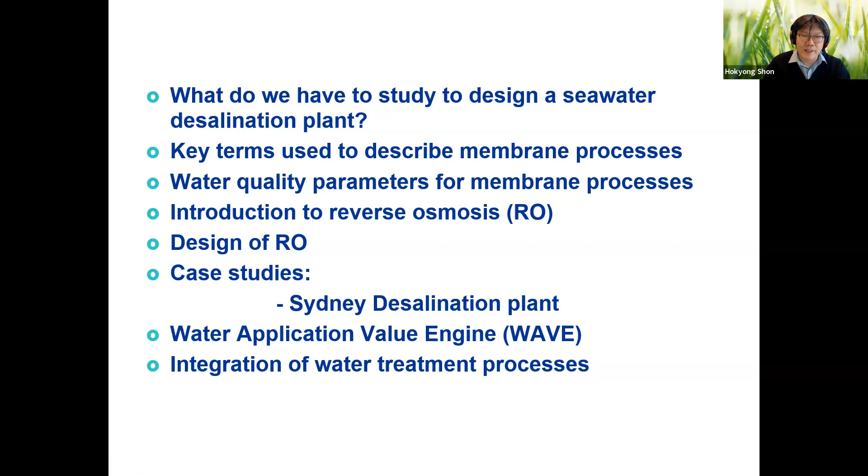For seawater desalination, you can see the global seawater reverse osmosis capacity. You can see the different types: thermal desalination, like boiling and distillation, then the seawater reverse osmosis membrane desalination process, and also brackish water and wastewater reuse desalination. Since 2013, for almost 10 years, thermal desalination has been very stable, but seawater reverse osmosis installations have increased significantly, and BWRO has also grown a lot.

Which means we can focus on seawater desalination using reverse osmosis, because it is more cost-effective compared to the thermal distillation process, and it is a more reliable technology. So we learn in this subject how to design your desalination plant using reverse osmosis. For your assignment 3, you need to design a seawater desalination plant for Sydney Water.

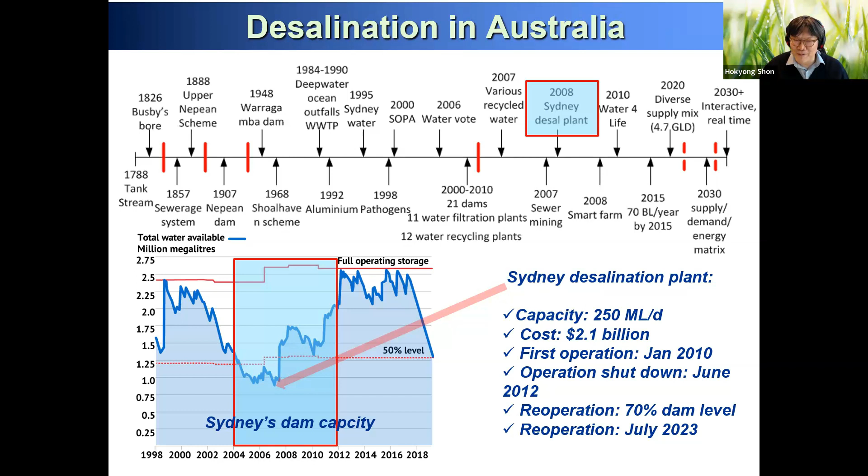So we have 6 desalination plants. Let's talk about what happened. We already discussed the Sydney desalination plant, so let's start from number 1.

And then Victoria, how about Victoria? Melbourne is one of the very interesting water supply systems. Melbourne Water has a very big mountain and dam to store their water. Melbourne Water doesn't have any drinking water treatment process, they just...

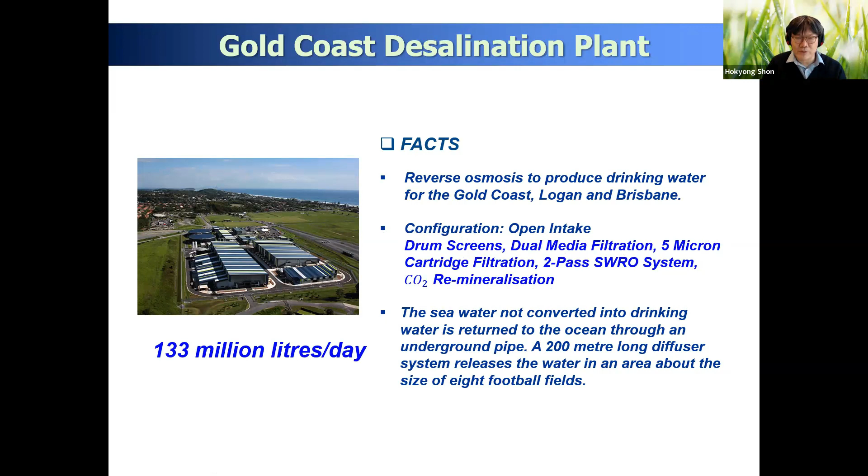Compared to the previous one, they have a slightly different process, so you need to compare which process is the most suitable.

Adelaide: 300 megaliters per day, and the plant can deliver up to 100 gigaliters of high quality drinking water a year, half of Adelaide's water needs.

The plant's water production capacity is extremely flexible. The output can be as low as 10% or as high as 100%. This plant is very different from the previous two because they have flexibility to increase to 100% fully, down to 10% operation, because they use ultrafiltration, second pass, and then seawater system.

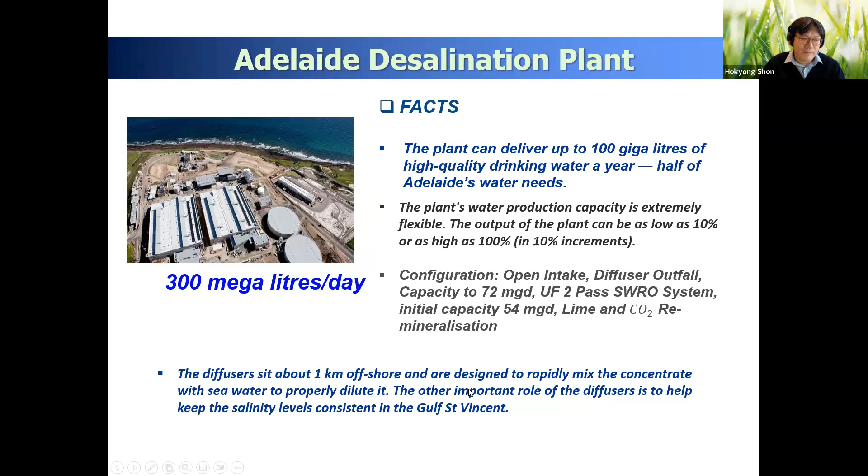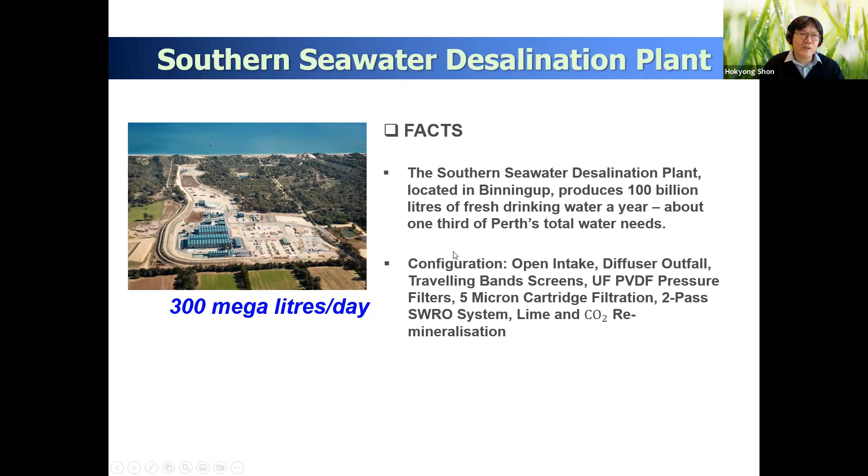The Southern seawater desalination plant, 300 megaliters, differs by using ultrafiltration. Compared to sand filtration or ultrafiltration, that's the different pretreatment you can utilize, then SWRO, which is used for the southern desalination plant.

How about the Sydney desalination plant? Sydney desalination plant: 250 million liters per day. The site covers an area near Kurnell, near the airport, a small area, about 25 kilometers from Sydney's central city.

This one has open intake and diffuser output, drum screen, dual media filtration, and cartridge filter, second pass SWRO system, lime, and fluoride. The fluoride is for cavity prevention, so you have more fluoride concentration to reduce cavities in your teeth, and you benefit from this.

Fluoride and CO2 remineralization. The specifically designed outlet nozzle ensures that the water returns to normal seawater salinity and temperature within 50 to 75 meters of the outlet. Approximately 58% of intake water is returned to the ocean, so their brine goes back to sea again.

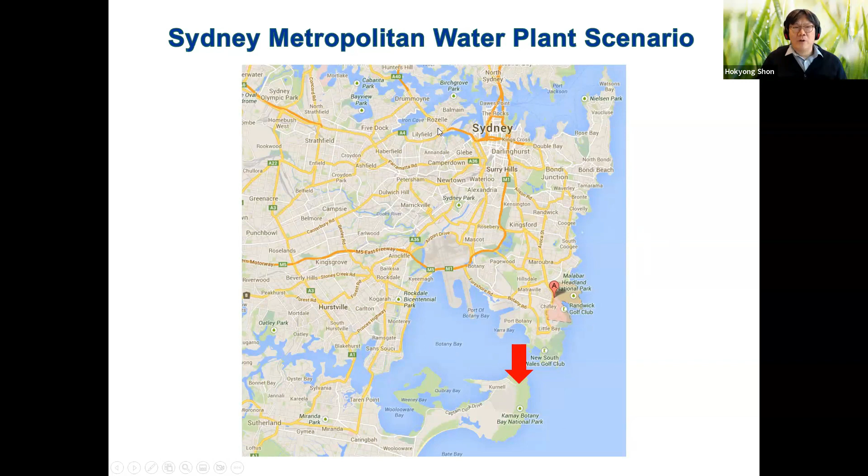This desalinated water goes to Sydney Park, which is part of the Sydney water distribution system. Combined dam water is coming to this Sydney Park, and then this desalinated water comes here to mix together, and they will supply drinking water in this area. That's how Sydney's water is maintained.

I will show you how the Sydney desalination plant works.

Can you see the video? No, Professor, no. Okay, let me show you, I will share again.

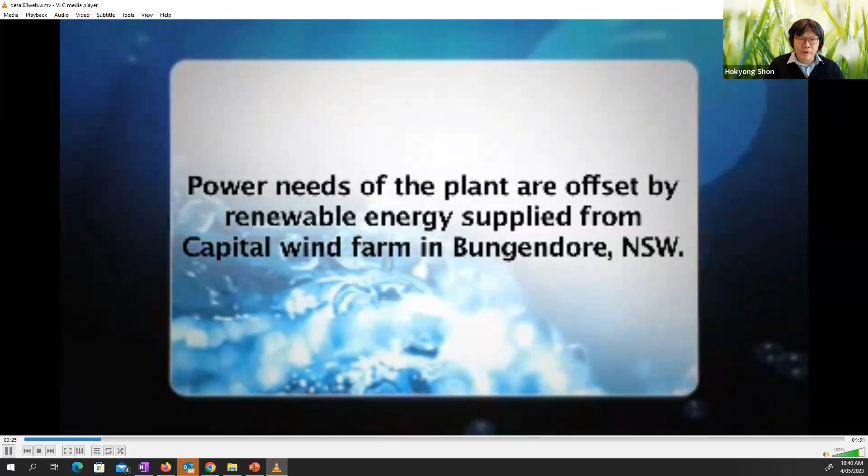Most of the power is from the wind farm near Bungendore. On the way to Canberra, I think you may also see this kind of wind farm.

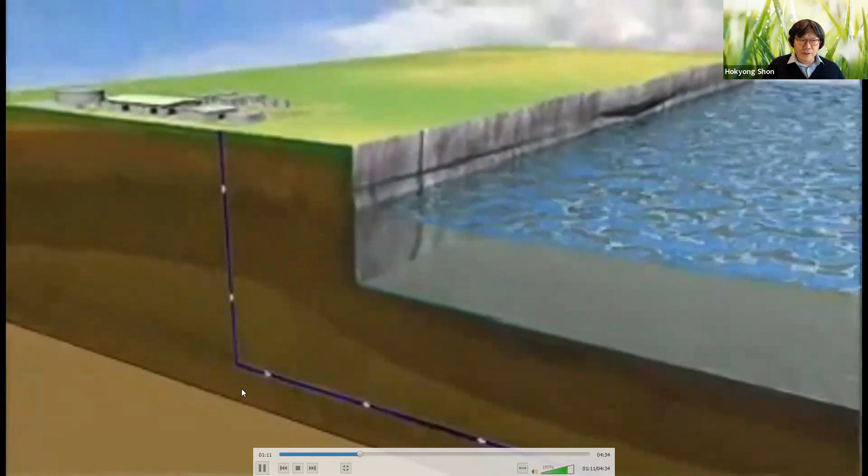This is the process showing how the Sydney desalination plant works. This is the water intake, almost 1 kilometer from the coastal line, connected with the intake. The seawater coming through the desalination plant looks very blue in color, and you have drum screening to remove some of the large particles or fish sometimes.

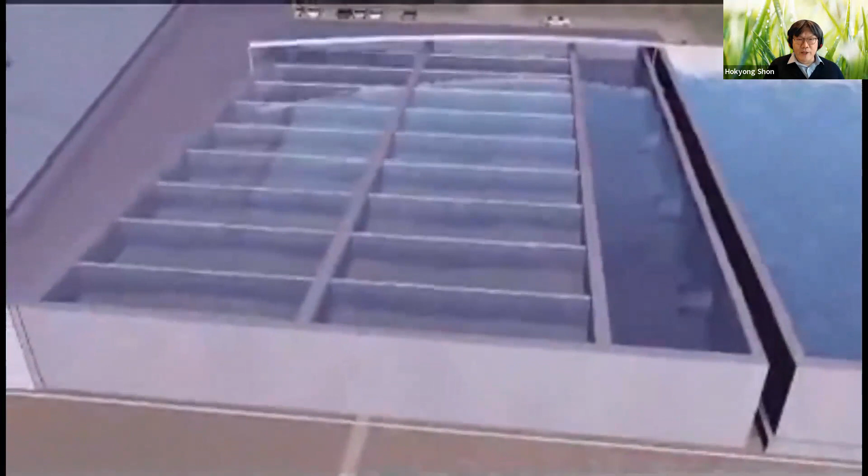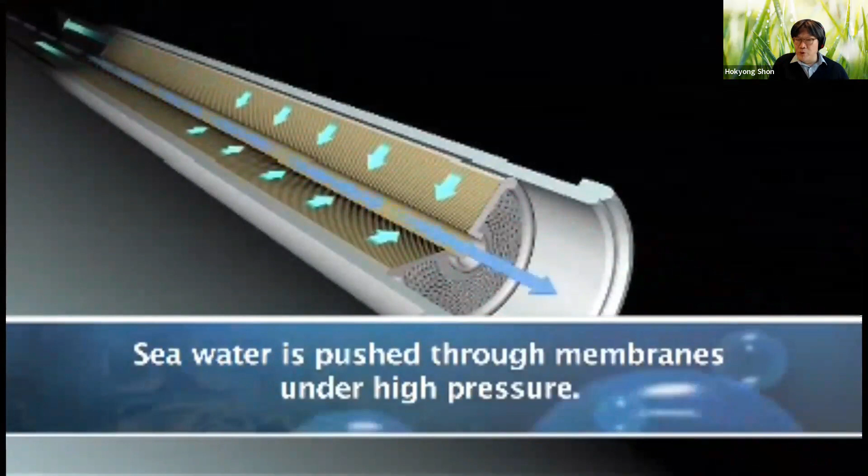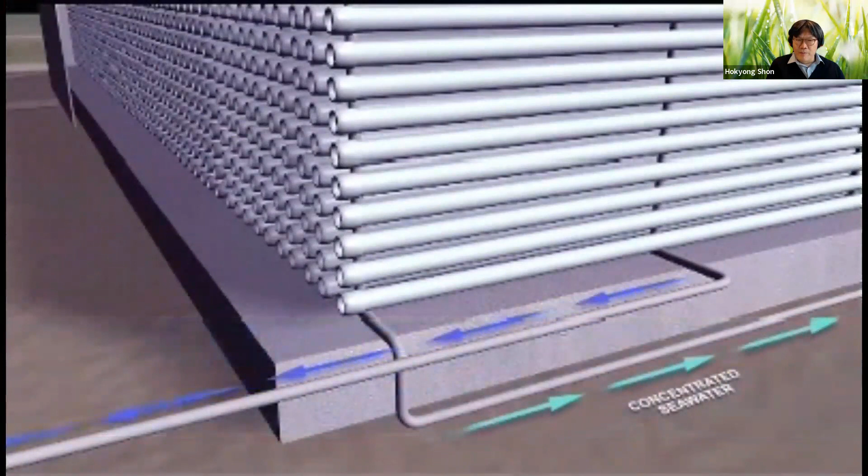Then it goes to the next pretreatment, sand filtration. Natural gravity passes the water through the sand filter to remove all the heavy objects, and goes to the reverse osmosis module. So you can create salt and fresh water separation, producing good quality desalinated water. This reverse osmosis creates fresh water, while the concentrate water goes back to the seawater.

Then mineral, fluoride, chlorination, and CO2 remineralization to meet the Australian drinking water guidelines.

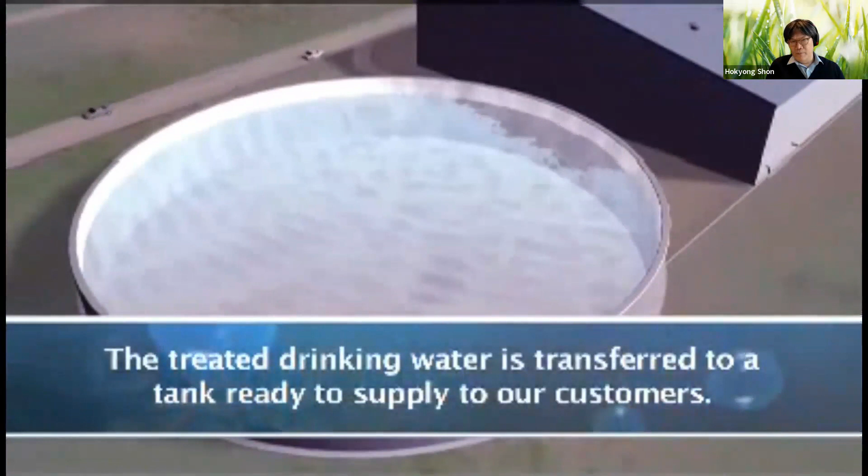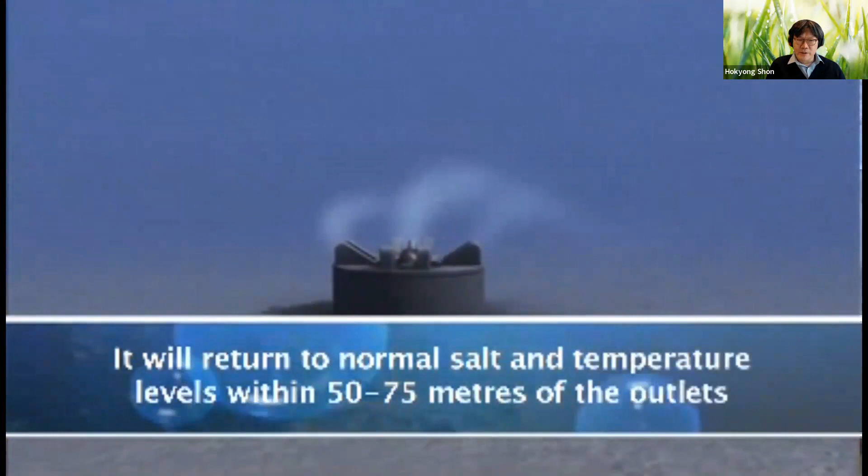This is the concentrate, so water is released back to the ocean. So you can see the diffuser. They have a diffuser because of the almost double concentration of salt. So fish don't really get impacted by this.

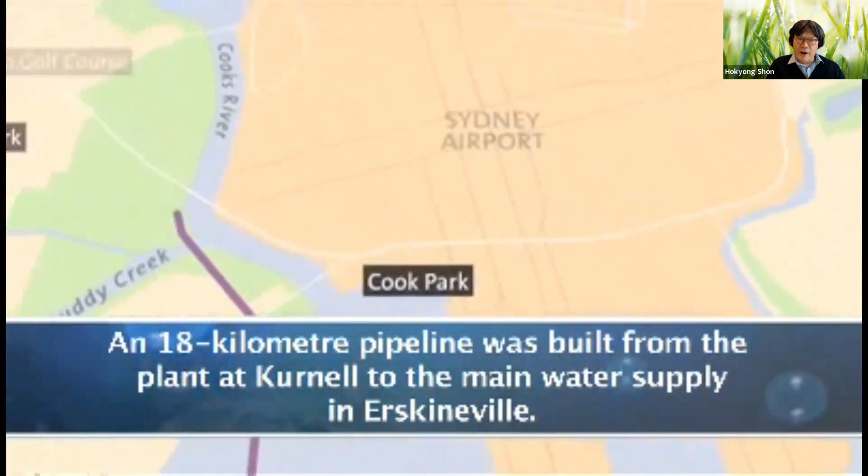So this desalination plant will supply your water passing through Botany Bay and then through your airport. So when you go to the airport, near the Cooks River, there is a very big black pipeline. You can see it with your eyes. Then this goes to Sydney's water supply system.

And then this yellow color, I'm not sure where you live, but you got the benefit of the Sydney desalination plant, mostly in the city, in the UTS campus as well. So we have good quality desalinated water. So that's how this works, the Sydney desalination plant.

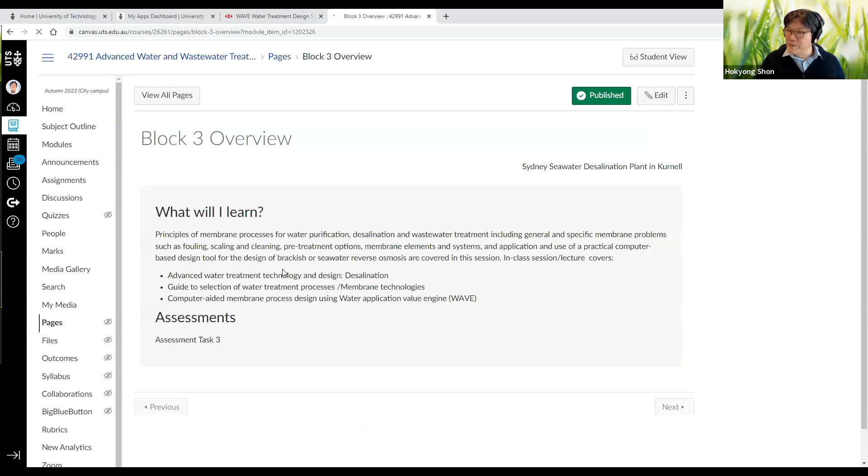Just want to start with our Canvas. Some people may have already looked at this detail, but I just want to remind you. Block 3 is already available with some information, so you can see the desalination plant; this block 3 is very well adaptable for your assignment 3. For reading materials, you can see the book Efficient Desalination by Reverse Osmosis, a guide to best practice. You can also refer to Desalination of Seawater. Every document is free as an ebook from our UTS library, so you can easily download and refer to it.

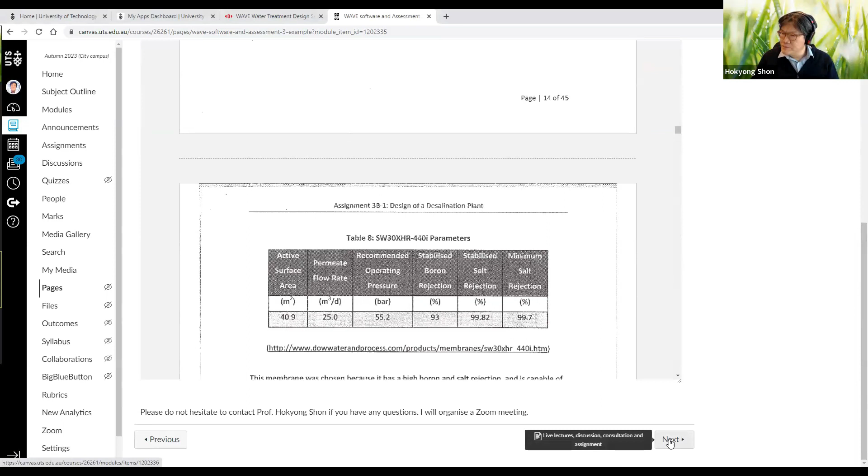Okay, that's what we have for the assignment. Let's look at the assignment. We have assignment 3. Assignment 3 will be uploaded based on the assignment scenario. The scenario will tell you the seawater quality and the parameters to design.

You need to look at the Sydney desalination plant water quality, as well as the total process volume from this scenario. The scenario will give you the basic information for your report 3, to discuss important issues related to desalination for future water security in Australia.

And then design details. So what's the process? You can follow the similar process of the Sydney desalination plant or Perth desalination plant. There are different processes of pretreatment, such as sand filtration or ultrafiltration. Based on your process diagram, you need to make sure of the detailed design of the RO process in terms of membrane, number of banks, stages, vessels, elements, and recovery.

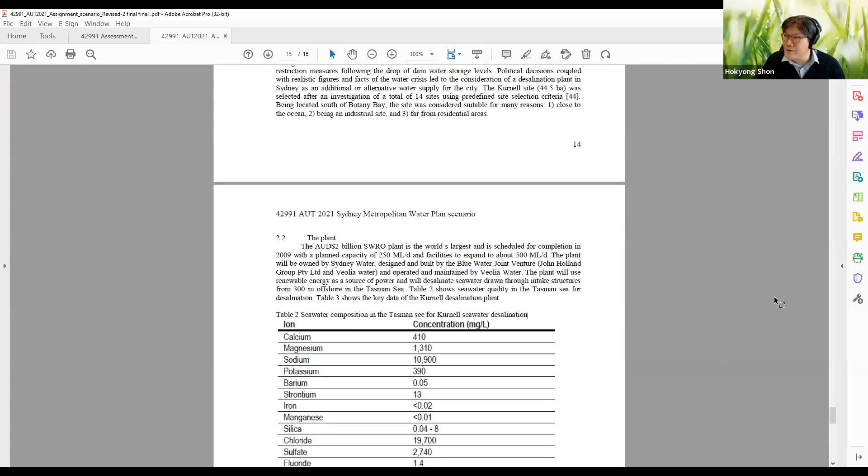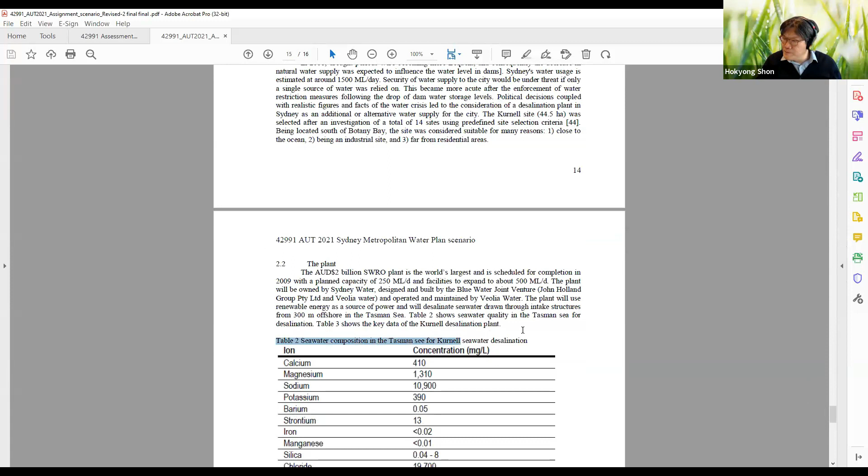So this is the scenario of your assignment. I'm sure you have already looked at this carefully. I want you to see your seawater desalination plant information from this scenario. What's the capacity? What's the water quality you need to take for your design? This is the basic information to have your own desalination plant. This is the water quality. You can use this water quality to operate your WAVE program. And these are the operating parameters of the Kurnell desalination plant.

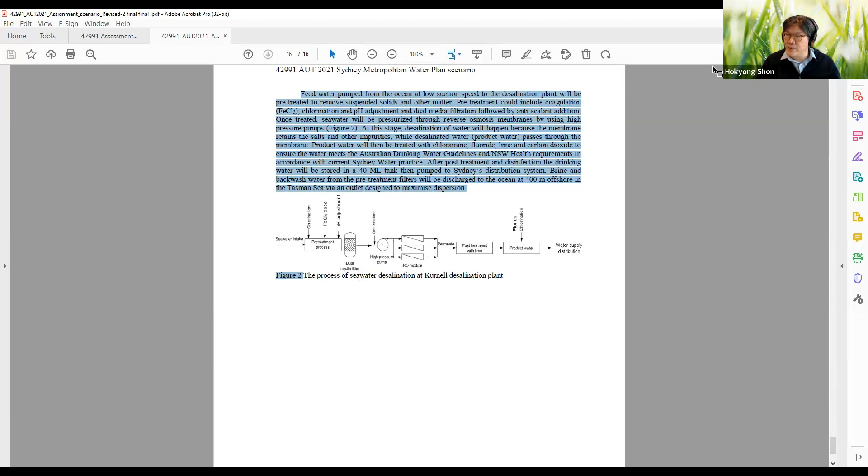This is the process flow diagram, but you don't have to follow it exactly. You can change it. You can change your media filter, or something else, or you can add to it. That's what we are asking for assessment three. Do you have any questions for assessment three? Is everybody clear? To do this kind of assignment, we have to learn the basic design parameters, considerations, and information for your seawater desalination plant. So we can start from this class.

Okay, this is one example, the Sydney desalination plant. They are operating this process diagram. This is how the seawater intake is coming, then chlorination, flocculation, pH, dual media filter pretreatment, anti-scalant, dechlorination, reverse osmosis, post-treatment with lime, remineralization with CO2, fluoride, chlorination, and finally discharge to the water supply system.

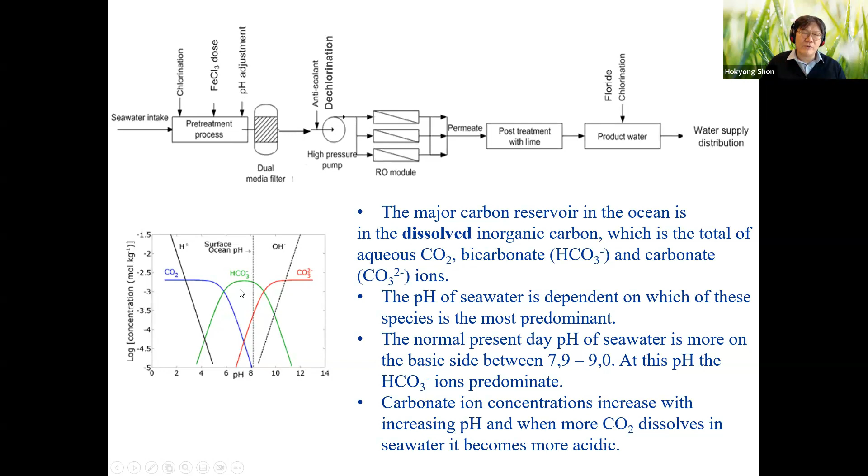Also, for pre-treatment, the Sydney desalination plant utilizes the dual media filter, which we call a conventional pre-treatment process. How about the Adelaide and Perth desalination plants? They utilize an advanced pre-treatment process, ultrafiltration. And this is the dual media filtration. I'm sure you have already experienced ultrafiltration with the membrane bioreactor. In the membrane bioreactor, hollow fiber ultrafiltration can be used. So you already know that advanced membrane technology can be used similarly for pretreatment in seawater desalination.

However, currently, conventional filters like a dual media filter or sand media filter are being utilized. But if you look at the capital cost, energy cost, total cost, they're very similar: $0.51, $0.52 for 1 cubic meter production. So what's the difference? Why do people prefer conventional or ultrafiltration? Depending on the initial capital, conventional is cheaper, but the energy cost of ultrafiltration is a little bit higher. Also, for overall quality, ultrafiltration has a much smaller pore size compared to a sand filter. So you will have better water quality, and this will protect your reverse osmosis membrane.

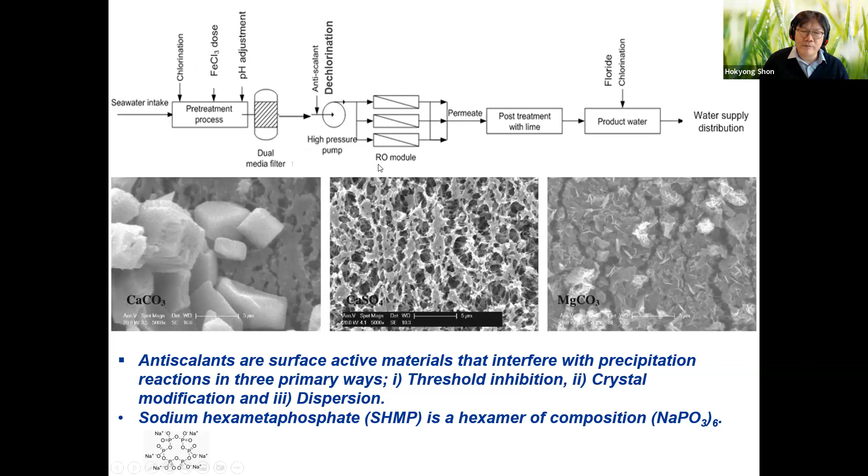Also, dechlorination. So why do we need dechlorination? So we have chlorinated here. We put in all the chlorine to prevent the biofilm, biofouling in the dual media filter. And before entering the reverse osmosis, you need to have dechlorination, because this will remove the chlorine. The chlorine will damage your RO membrane. The RO membrane is polymers, so chlorine oxidizes your polymers, so the RO membrane keeps getting damaged from the chlorine. So dechlorination is very important in your process.

The addition of sodium metabisulfite. The sodium metabisulfite is this compound, NaHSO3. The chlorine combines together, so they create NaHSO4 and 2HCl. So the chlorine oxidation power will significantly reduce. So we need to put in this SBS at a 3:1 ratio of SBS to chlorine, and then you can remove all the oxidation power from chlorine.

So we need to completely remove the oxidation power of the chlorine, or sometimes you can use a granular activated carbon filter to convert, with the chemical substitution process, the chlorine to chloride ion. The chlorine is a very active oxidant, but chloride ion is a very stable condition. It doesn't have any oxidation, so we can utilize it as RO membrane feedwater.

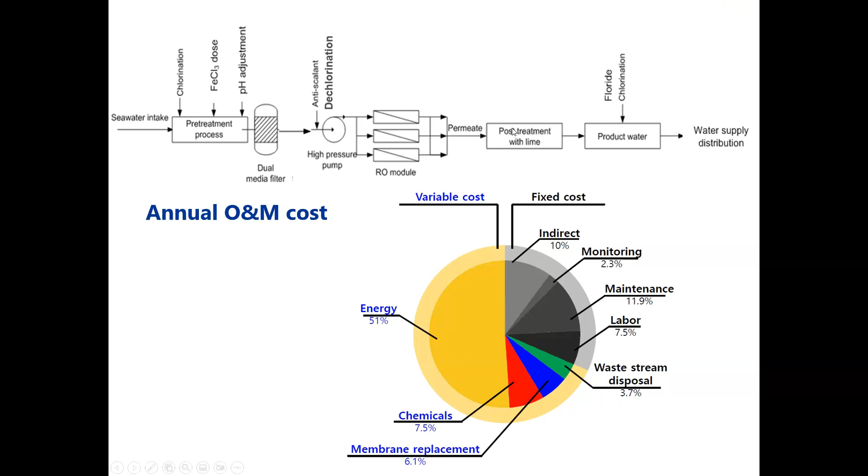What's the lime? It's a basic solution, right? People are confused about lime. Some people, mostly the general public, think lime is a fruit, a little bit sour, like lemonade or lime. Yeah, that's the misconception. That's why you're confused. This lime, we just say limestone. We are in the chemical water area, water professional engineers. So when we say lime, we are talking about limestone.

Which means calcite limestone, CaCO3, or lime itself is calcium carbonate or calcium hydroxide, Ca(OH)2. So lime here is calcium hydroxide or calcium carbonate. That's what we are talking about. So mineralization with calcium is the main key point for this lime. It's not your fruit lime or edible lime. It's more of a mineral, calcium limestone, that we are talking about.

Thank you. Thanks, Professor. You're very hungry, Sarah. That's why you're just thinking about fruits.

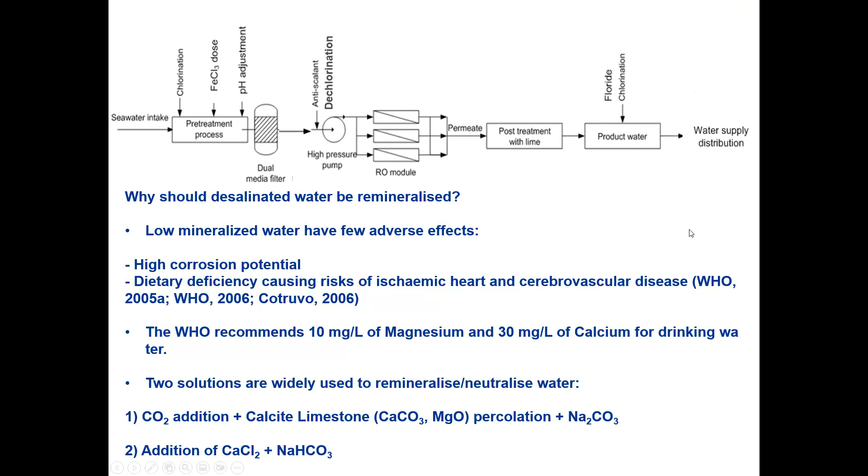Okay, Professor, thank you. Any other questions?

Otherwise, we continue with our key terms. Already you learned about flux from block 2. Permeate also you have experienced. And then concentrate - concentrate waste from membrane, so we just say brine or reject. Brine is the most convenient word from my side, for your high concentration water after membrane filtration.

So recovery is very important - how much you recover. Seawater has 3.5% salt concentration. If you recover 50% of the seawater, which means your feed water to permeate ratio is like feed water 100 cubic meter per day, then permeate is 50 cubic meter per day - so you have almost 50% recovery. When you recover 50%, your brine salt concentration is almost double, which means you have 7% brine concentration in your RO brine. The RO brine at 7% we can discharge, or we can look at whether it creates more inorganic scaling.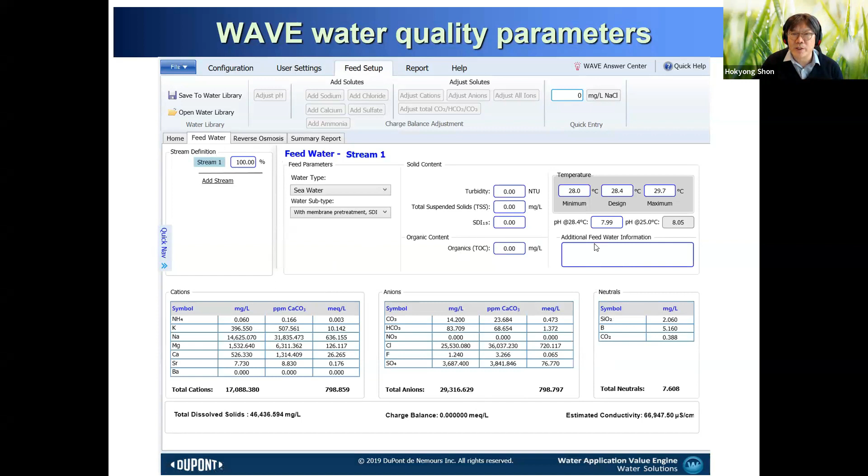Next item is seawater reverse osmosis history. Desalination has existed long ago, AD or BC, several thousand years ago. A lot of people utilized distillation: you boil your water to create distilled water, and then you condensate it.

This creates very high purity water. But desalination plants have a big scale for reverse osmosis. Distillation has a very long history, but reverse osmosis only started from 1956 in Kuwait, and then commercially in 1970. At that time, people believed the energy cost was 10 kilowatt hours per cubic meter, which was much more expensive compared to distillation.

Then one person developed energy reduction cost improvements, which was the first technology innovation: the RO membrane. The RO membrane was developed from almost 1980 till 2000, so reverse osmosis membrane further developed during this period.

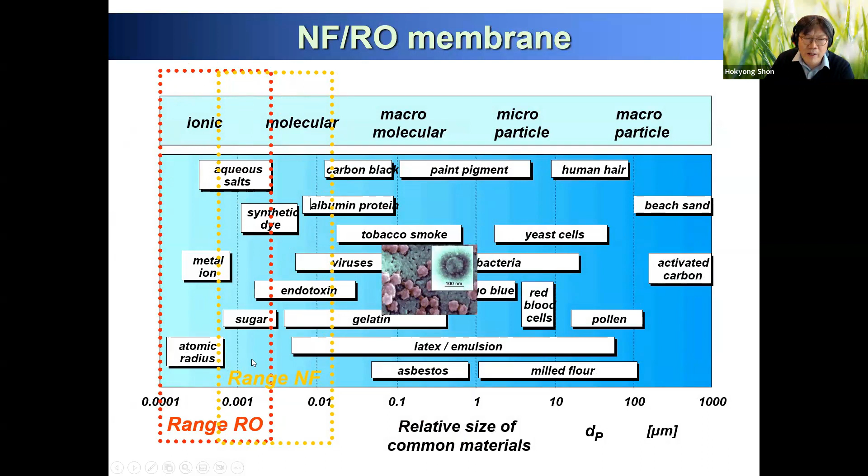Reverse osmosis membrane pore size is around 0.0001 to 0.001 microns, small enough to remove sodium chloride and every salt in your RO system. This is a non-porous membrane. As membrane thickness increases, permeable flux decreases, so the active layer should be as thin as possible. The active layer mainly separates salt and water.

The water molecule has a very small size, about 0.3 to 0.4 nanometers. The salt, sodium and chloride, has a size around 0.8 nanometers. So you need your RO membrane pore size to be almost 0.6 nanometers, so that you can separate sodium chloride from pure water molecules. That's why making the active layer as thin as possible is very important.

Also, you have an asymmetric membrane structure, a thin film composite. So how does reverse osmosis look? You have this one element, containing a spiral wound type structure. The membrane looks like this, with the active layer.

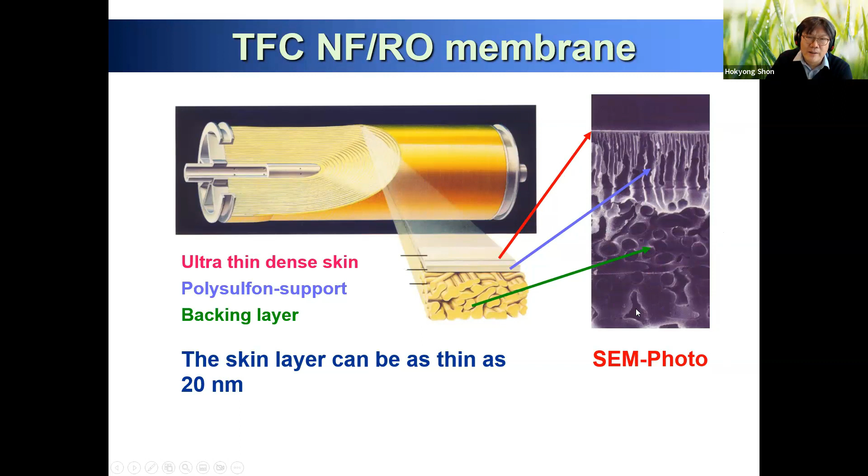The skin layer is only 20 nanometers, and this support layer is around 200 micrometers. You can also have almost 1,000 micrometers for your backing layer. That's how this works.

Let's look at a video of the membrane, how it's generated, the RO, and how it separates water molecules and salt. Let me show you a video.

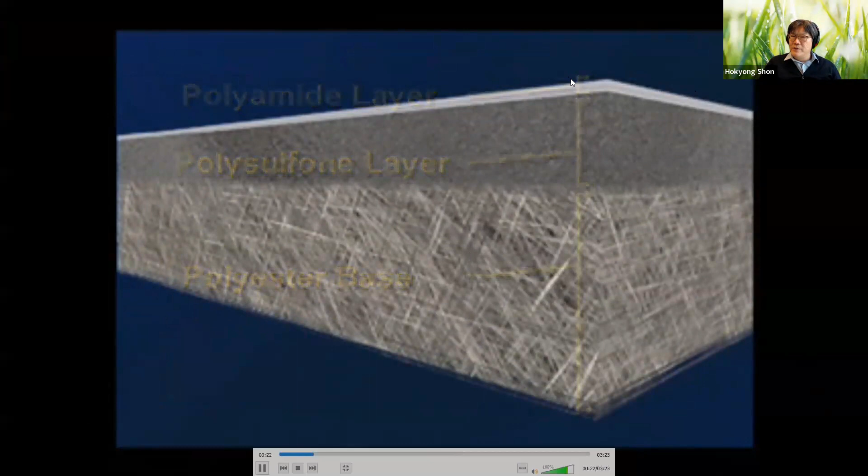So I will show you this video of how they create the reverse osmosis membrane. This is the polyester, a non-woven backing layer, and polysulfone, which is like a support layer, and this is your active layer.

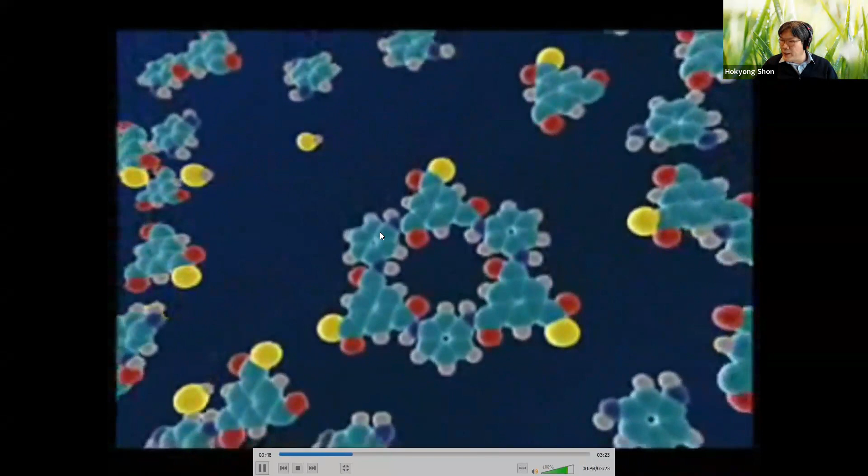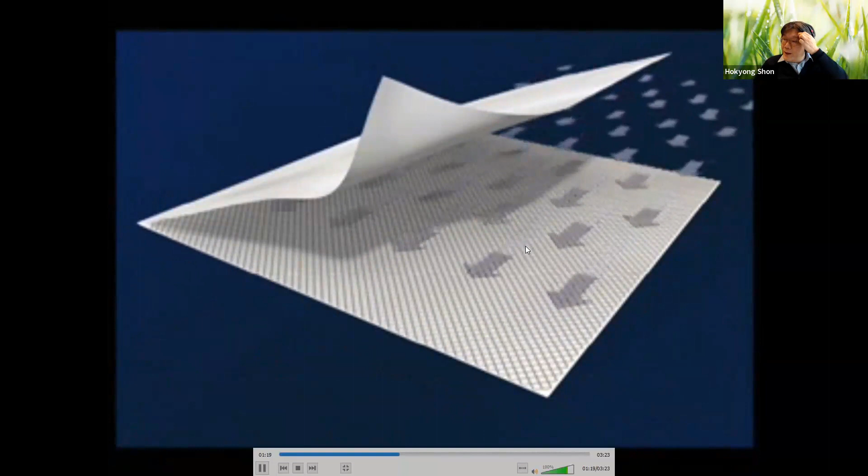So this is a polyamide structure. You just put the polymer, and this polymer will be interfacially polymerized this way. The amine monomer will create this kind of pore size, so the water molecule can go through this pore size. However, if you have a salt molecule, it cannot pass through the pore size of the polyamide membrane.

So you can fold this active layer, and water passes through in between your membrane. You put your glue, and then you put the membrane with your spacers, creating a membrane surface area, and on the other side pure water passes through and is collected in the middle of your pipeline. It's just like a roll, what we call a spiral wound element.

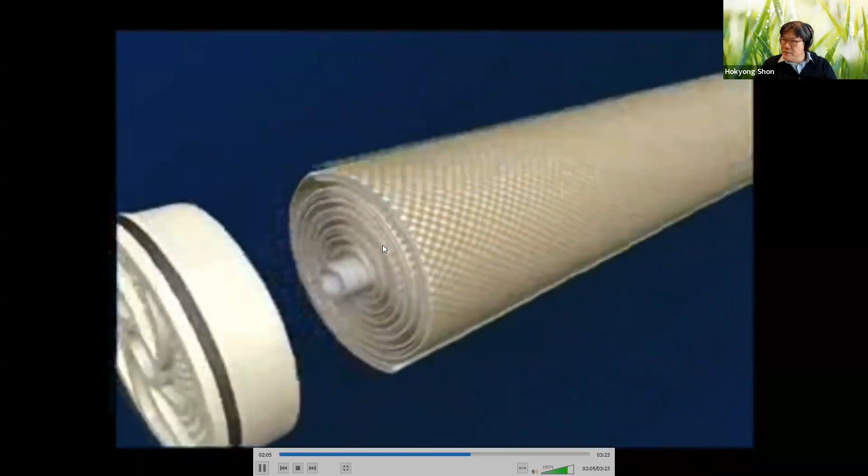The water is flowing inside the membrane, and then it will be collected in the middle of the pipeline as water molecules. You can separate water molecules and salt - that's how you create the reverse osmosis membrane.

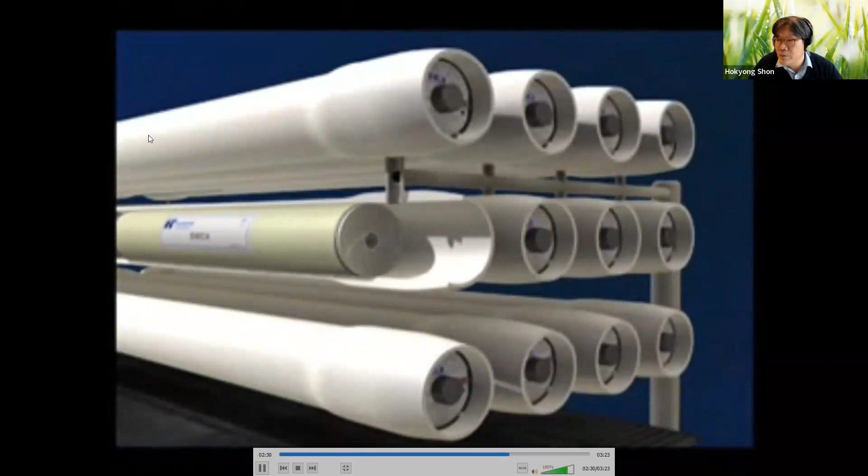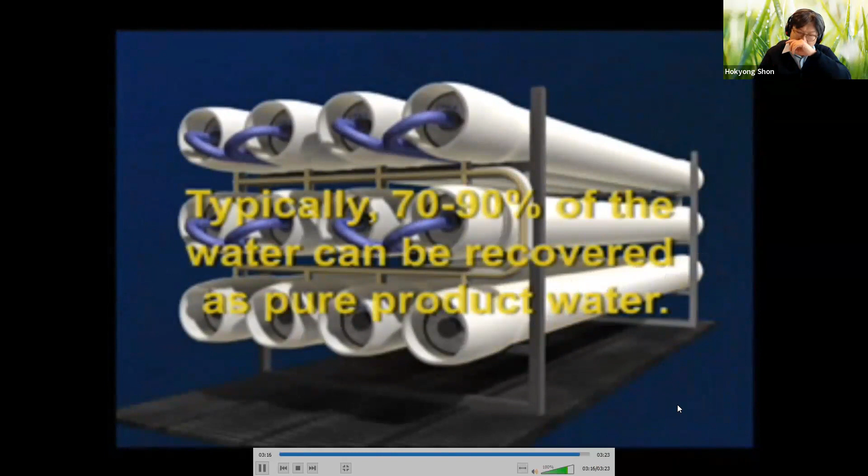You can separate fresh desalinated water and RO brine, so you have two different streams. About 90% of the water can be recovered as pure product water. That's how the reverse osmosis membrane process works.

So it's like a polymer, like a paper, but you can separate materials - the water molecule and the salt.

So does everybody understand what the TFC membrane is? Now we are going to discuss transport phenomena. The mass transfer across the membrane is diffusion and based on osmosis.

Concentration polarization is also very important, and permeate flux is limited by osmotic pressure and concentration polarization, apart from intrinsic membrane resistance, fouling, and scaling. So if you see this...

Osmotic pressure - what happens is we have reverse osmosis and forward osmosis. Reverse osmosis means you have a high concentration of salt, let's say brine, and fresh water. Different salt concentrations create different osmotic pressures, and you have a membrane in between.

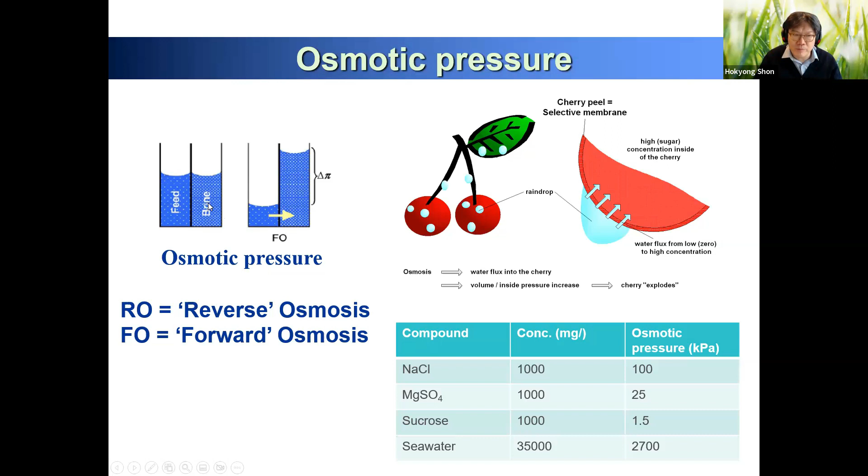So you will get good reverse osmosis. You overcome the osmosis reversely, and you create salt water to brine, and fresh water - that's what we call reverse osmosis.

This was developed by Van't Hoff, who got the Nobel Prize in chemistry. He developed this equation: Pi, osmotic pressure, is equal to...

...concentration times R, the ideal gas constant, times T, the temperature. Concentration is your ionic concentration - sodium chloride has two ions, so what's the concentration? Magnesium also has two ions. Depending on how many ions and how much charge you have, this creates osmotic pressure differently. So this simple equation can be used for osmotic pressure calculation.

Then seawater desalination. This is the feed water and reverse osmosis. The osmotic pressure of seawater is almost 30 bar, and the energy consumption is around 3.5 kilowatt hour per cubic meter. Recovery, you have 50%, 0.5 QF, which means 50% recovery of permeate flow to feed flow.

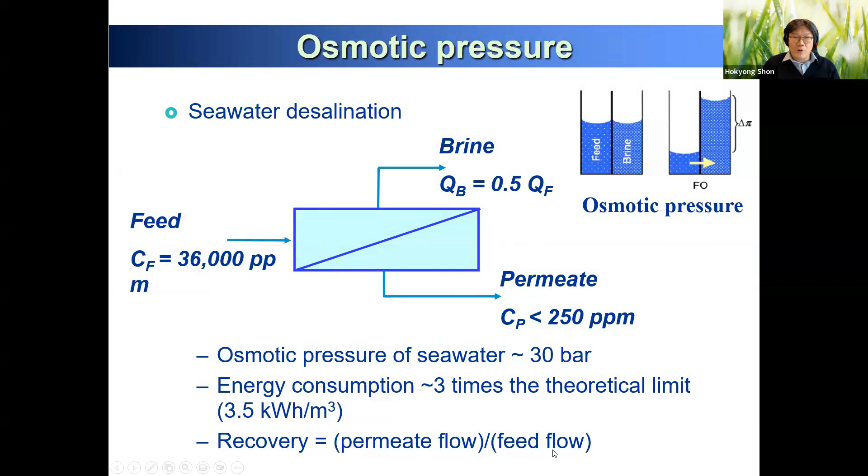So we can have this kind of concentration polarization. You have bulk seawater here and the membrane. Your water molecules pass through the membrane, and you can see that your salt will accumulate more and more on top of your membrane surface. So the real concentration on the surface is different from the bulk, which means there is diffusion from the membrane surface back to the bulk solution.

So we call this concentration polarization. The back diffusion can be enhanced by cross flow. When you have a very high cross flow, you can remove the accumulation of salt, so the high cross flow will create a high shear rate, which means you will have less concentration polarization because of the back diffusion phenomena. So that's how we calculate concentration polarization.

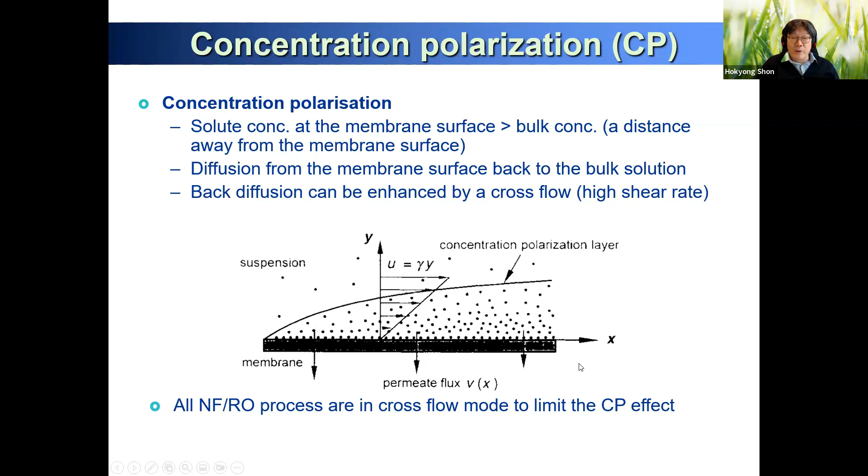But this kind of calculation is very time consuming, and you need to do it by hand, so we don't calculate it manually, but we can utilize our software, WAVE software, to calculate this concentration polarization. Also, nanofiltration, reverse osmosis. We have standard membrane element types.

So BW4040, which means brackish water, 4-inch, 40-inch. 40-inch is 1 meter, which is the length of your element. 4-inch is your diameter, which means 10 centimeters. It's how much module element you can use. The bigger one can produce more water. Small one like 4-inch, 40-inch, 8040, which means 8-inch, 40-inch, and this is 2.5-inch and 40-inch.

So based on your water permeability, you can decide what's a good element design. Also compatibility: the pressure vessel you put your module in, what size is okay, and we can create a better pressure vessel size and element. It's a simple design, benefiting R&D, end users, and manufacturers, but there's a lack of diversity of these elements. So let's look at the video of the NF/RO element, how they create this kind of element.

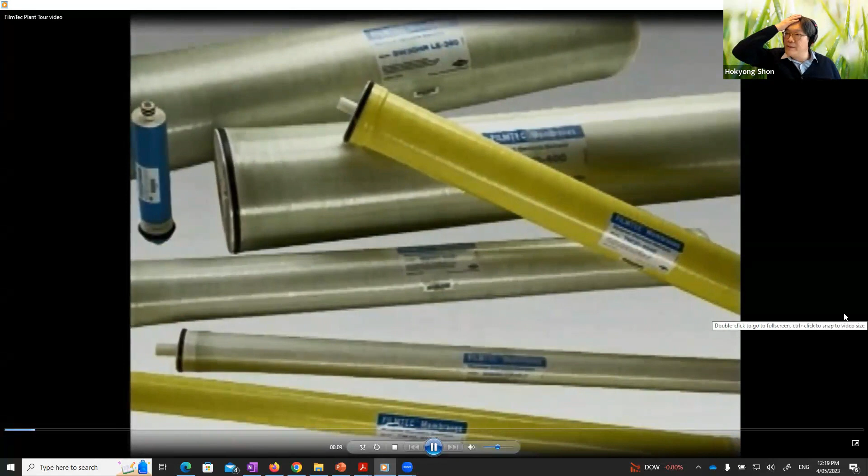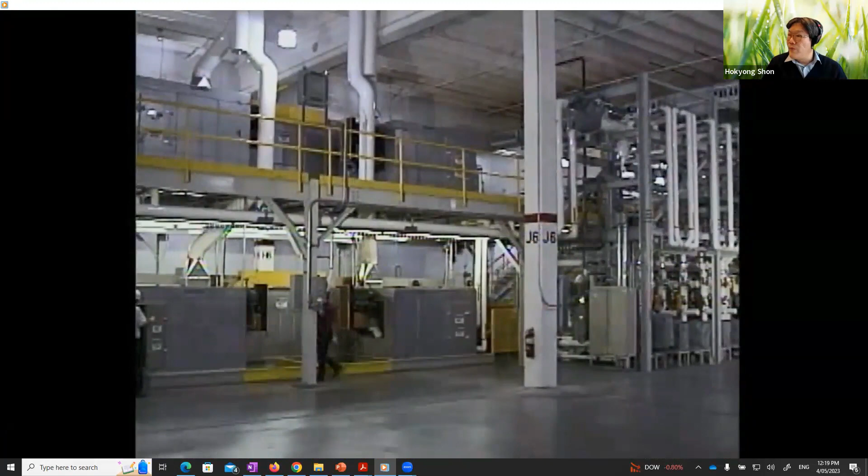So this is from Dow Chemical. They create this kind of thin film composite element module. You will see how they create this element for RO membrane. So this is the RO membrane, interfacial polymerized, IP, and they make a spiral wound type using this manufacturing system. So this is how they create the modularization.

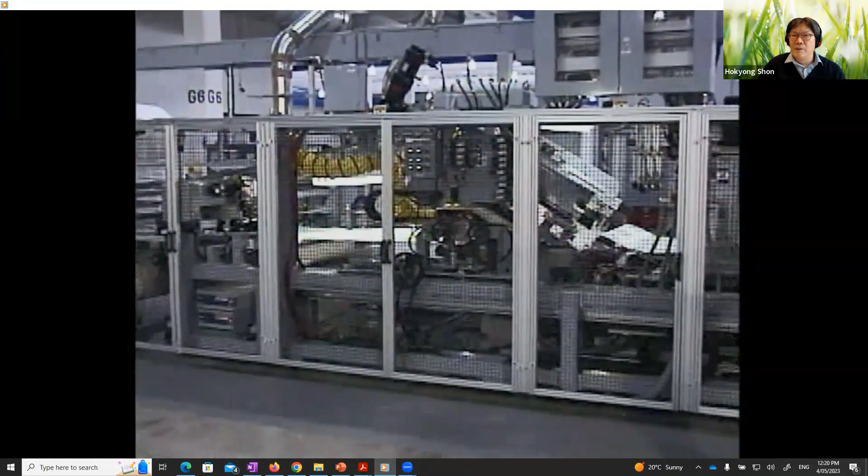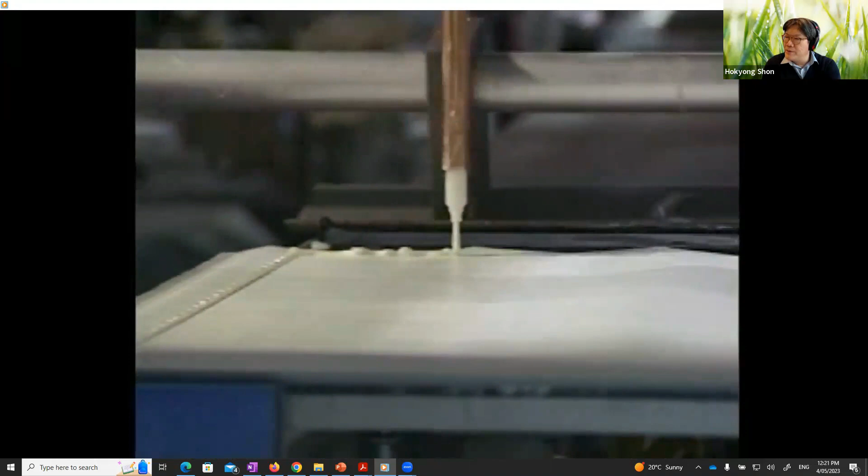Robotics for leaf construction and assembly ensure that every element is precisely built without membrane damage that often occurs during manual handling. Automation enables construction of more shorter leaves compared to manual rolls, resulting in a more efficient product that is less prone to fouling. Precise computer-controlled glue lines ensure the highest active area in the industry with guaranteed accuracy and minimize leaks, which can result in poor permeate quality. FilmTec elements are optimized to have the highest active area combined with the thickest feed spacer in the industry, offering improved cleanability, lower pressure drop, increased durability, and the ability to handle more challenging feed waters.

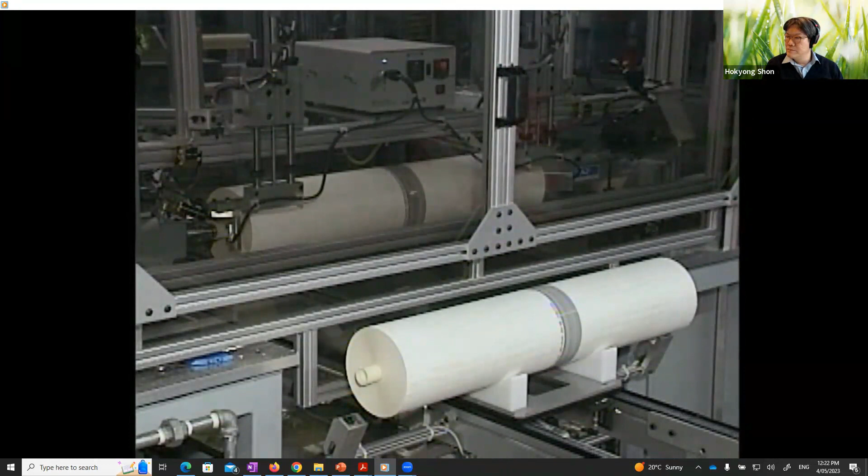A unique barcode allows continuous tracking of each element. Online quality checks for scroll integrity and dimensions and an inline vacuum test are performed on every element to ensure mechanical integrity. Any elements failing preset measurements are discarded. End caps are welded to the product water tube in a process that improves element strength, and a quality test ensures weld integrity.

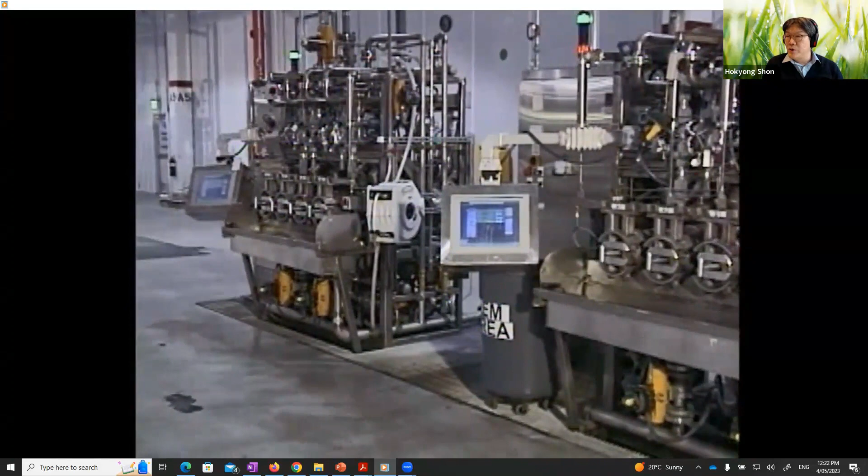So you can see that this automated fiberglass process ensures exact and uniform fiberglass outer application within controlled dimensional tolerances. To validate final element performance, FilmTec uses both a traditional 20-minute performance test and a groundbreaking pulse integrity test, which has the unique ability to detect and diagnose mechanical defects. It costs around $100 for one element, but you can utilize it almost 5 years on average.

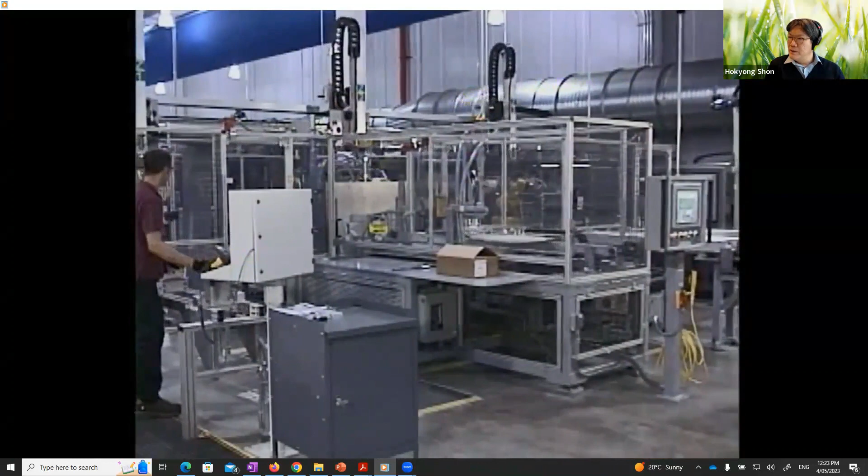Tests are computer controlled, and elements not meeting defined permeate flow and rejection ranges are discarded. Custom designed packaging equipment with precision-injected preservative ensures protection for elements during storage and transportation and easy handling.

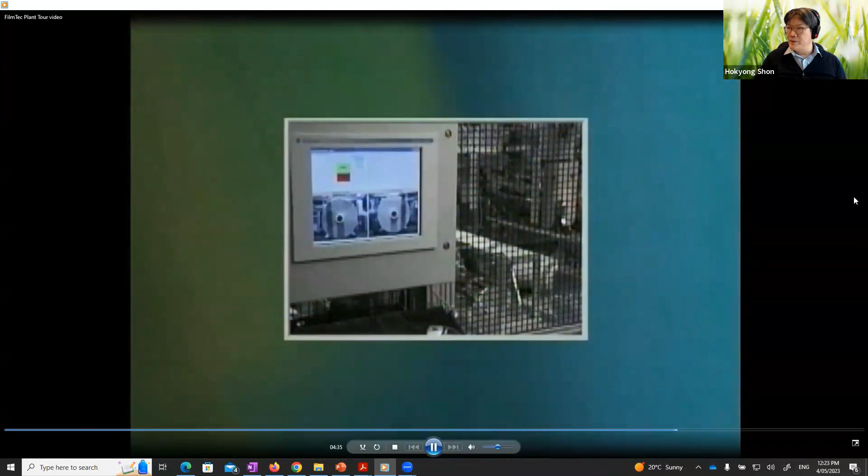Prior to shipment, each customer order is scanned for traceability and to validate all previous quality checks. Quality is built into every FilmTec element, from the management of the raw materials to final shipment. Every element undergoes multiple inline quality measures. This is the very typical 8 inch product, 40 inch, 1 meter length, 20 centimeter diameter, used for your seawater desalination plant.

Professor, yes. I can get the difference between this video and the one we watched before. Before, you looked at the polymerization, how this polymer arranges by the self-assembly method, and how they create the polymer of the backing layer, the non-woven layer and support layer. But this one is more about how the real polymer element can be generated. Initially it was more detailed membrane for the first video, and this one is how the membrane actually creates the modularization. So module, that's the difference.

Is it okay? Yes, thank you. Hmm.

So this is the video I showed you, and we can start with the pressure vessel, and you will see how it's better. So this is the one element, one module we create. We purchase from Dow FilmTec or some other company. There are many companies, around 50 companies, manufacturing this element. So we put it into the pressure vessel.

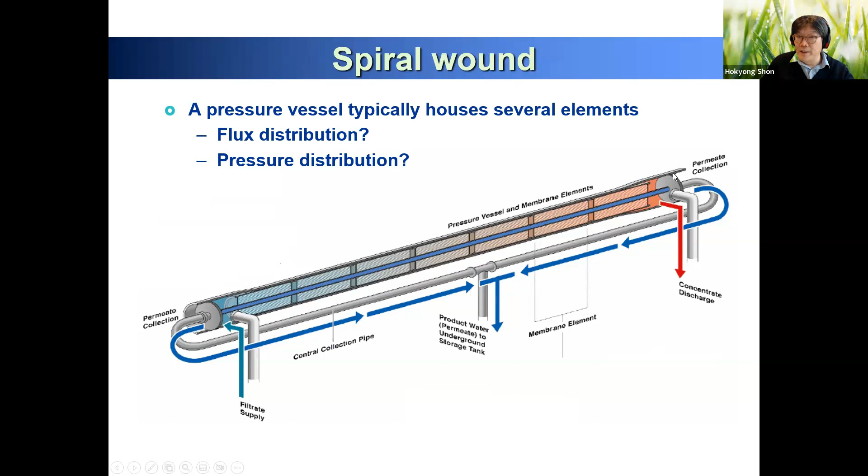Also think about the first element versus the last element: the TDS is low at first, and very high at the end because it's concentrate. For permeate flux, the first element in one pressure vessel captures more than 25% of your permeate water, but the last one collects less than 5%. So every pressure vessel, every element has a different permeate flux and salinity, and we calculate and mix them together to get the final recovery rate and final permeate concentration. That's how to design your final pressure vessel location.

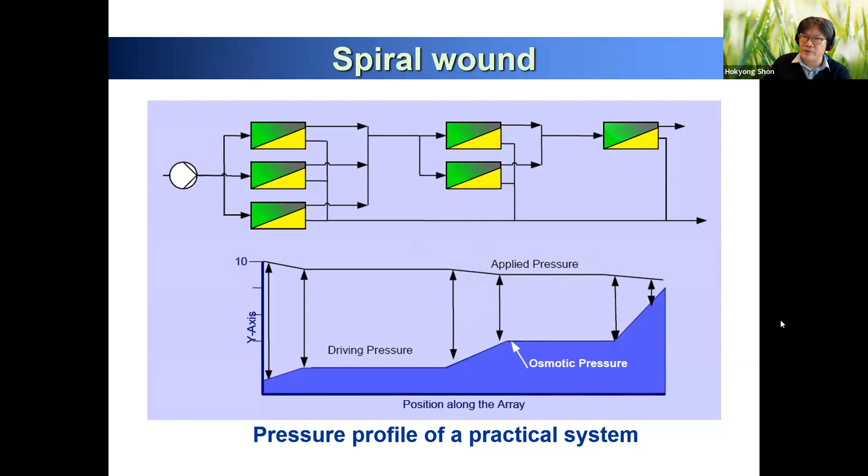So the booster pump can be used because you have a pressure loss, and then you can try to put the booster pump to maintain the same pressure. So if you want to have a higher water recovery, you can utilize the booster pump so your applied pressure keeps increasing. And then osmotic pressure keeps increasing, and then your applied pressure minus osmotic pressure will decide your permeate flux. So how we can design this kind of booster pump usage.

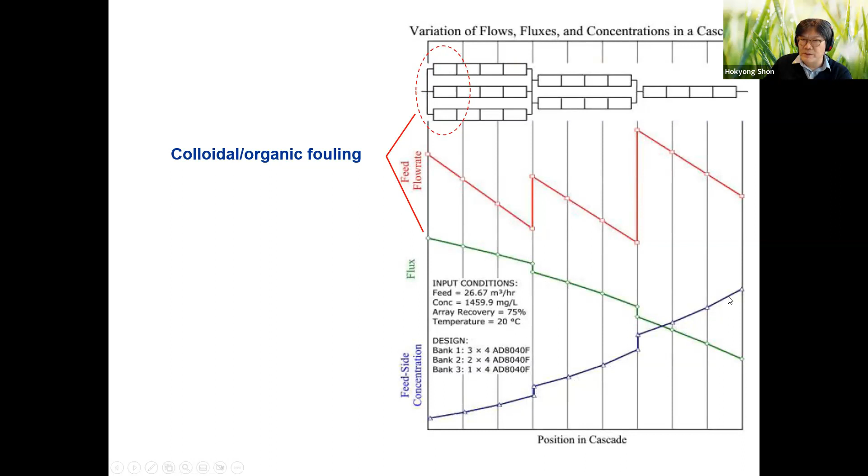And this is the initial, like a 3 pressure vessel, 2, 1, 3, 2, 1. And then flow rate is very high and it keeps decreasing. And the feed flow rate also keeps decreasing. And the flux also keeps decreasing because your flux is initially high, but your brine concentration keeps increasing, which means you have more colloidal organic fouling at the initial pressure vessel.

At the end, because you have very high concentration of feed salt water, and your flow rate is also relatively low, and your flux is very small, you create more silica or inorganic scaling at the end of your staging. And excessive differential pressure can create damage to your membrane element.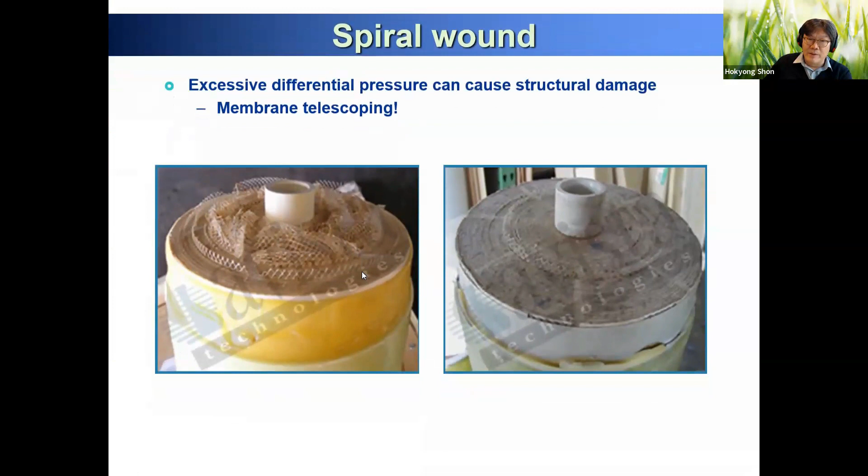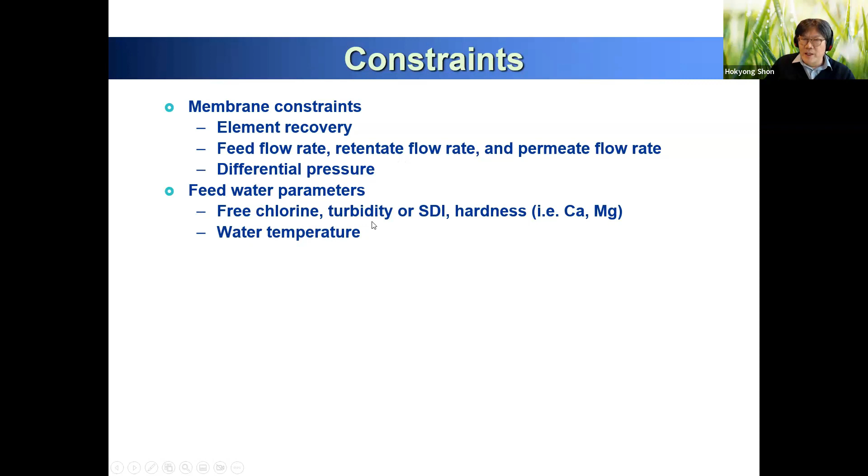So we can have some example of the production volume, permeate quality, system flexibility, membrane. So this is the membrane constraint: element recovery, feed flow rate, retentate flow rate, permeate flow rate, differential pressure, feed water quality also, free chlorine, and turbidity or SDI, hardness, so that the water temperature will continuously increase. So that's how you need to consider your design of the reverse osmosis.

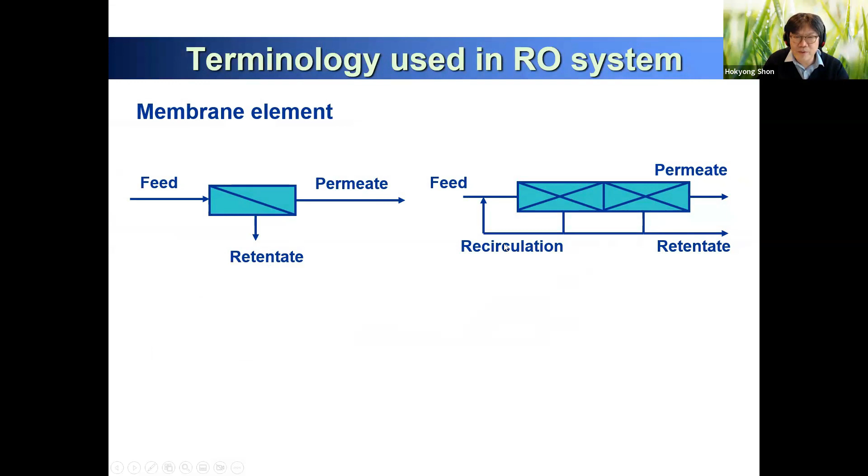So let's look at some more detailed terminology. The feed water, permeate, and this is the retentate, reject, the concentrate. So brine will be here. Sometimes you need recirculation, and some of the recirculation can be designed together. Also, this is the average permeate flux, LMH, liter per square meter hour. So how much water is produced from 1 square meter of your membrane surface for 1 hour. So this is the LMH unit you can use.

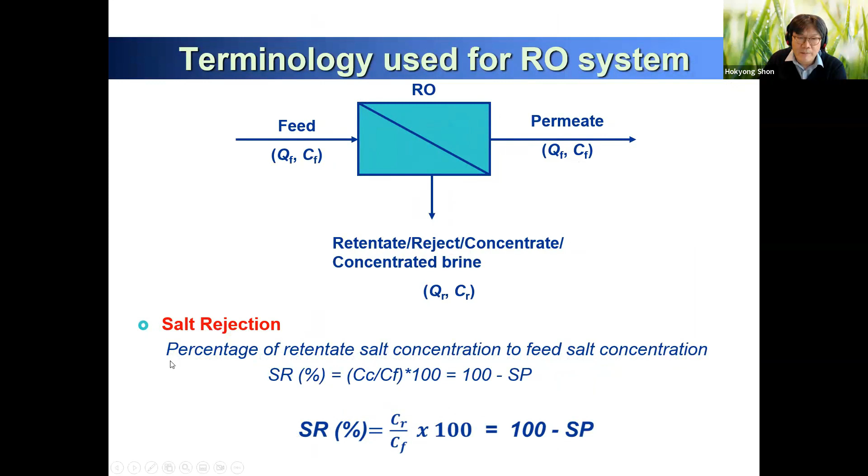The salt passage is CP, concentration of permeate, and then feed water concentration, and you have how much salt passage. Also salt rejection, CR, concentration of retentate or brine, and then feed water concentration. We just say 100 minus SP is salt rejection. Also recovery rate. So you have QP over QF multiplied by 100. So we have this recovery rate ratio.

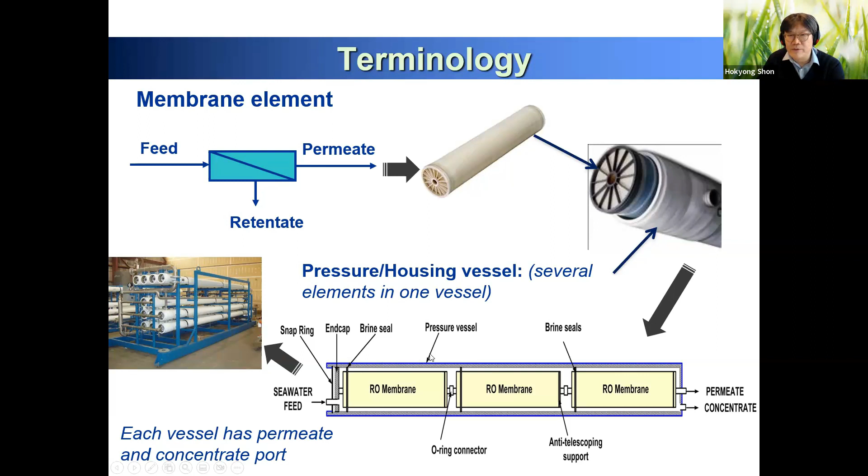And this is the general element, pressure vessel. This is a unit, like a grouping with the pressure vessel, different stages, permeate flow, and we also have a pumping here, and all connected is one unit of your membrane element. Also, flow dynamics in RO element. So you can see the flow dynamics for a single element.

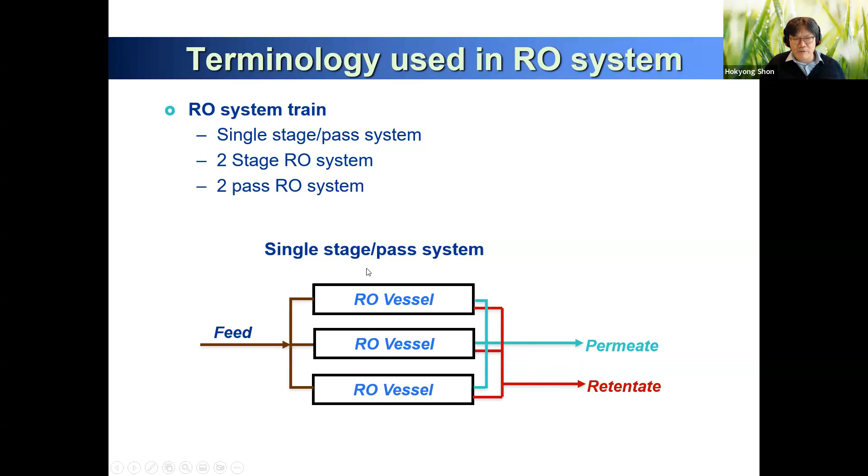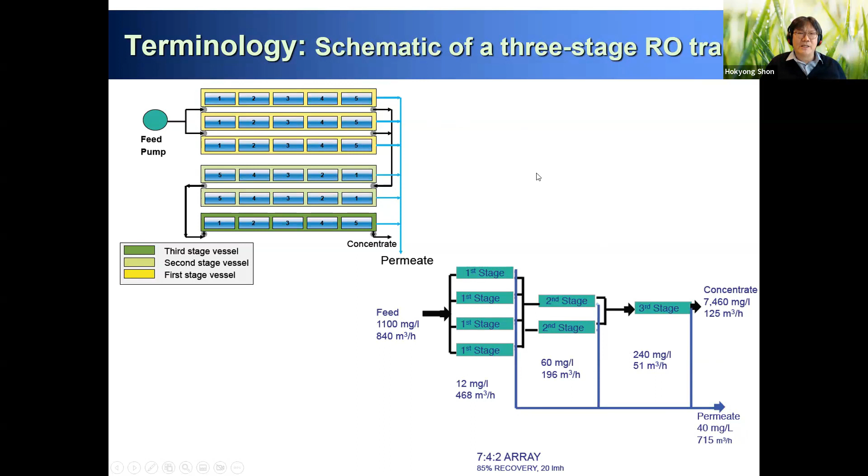So based on the feed water, brine, and permeate, we can decide what array you need to have, then what permeate recovery we can get, and then finally we will get a good design of your stages and the RO membrane. Also, we have two passes. We already discussed two stages and third stages, but this time it's two passes.

So in your assignment, you have a boron issue. The boron concentration is a little bit high. So we want to remove more boron, so we need to go through a second pass. The water first produces permeate in the first pass, and the concentration of boron is high, and then we go for another rejection of the permeate, and this boron concentration will be lower than the first permeate.

So that's the reason why the second pass will give you much cleaner water quality if you are very concerned about ion compounds such as boron. So in your assignment, we are asking, given your boron concentration, how we can remove it better using this second pass.

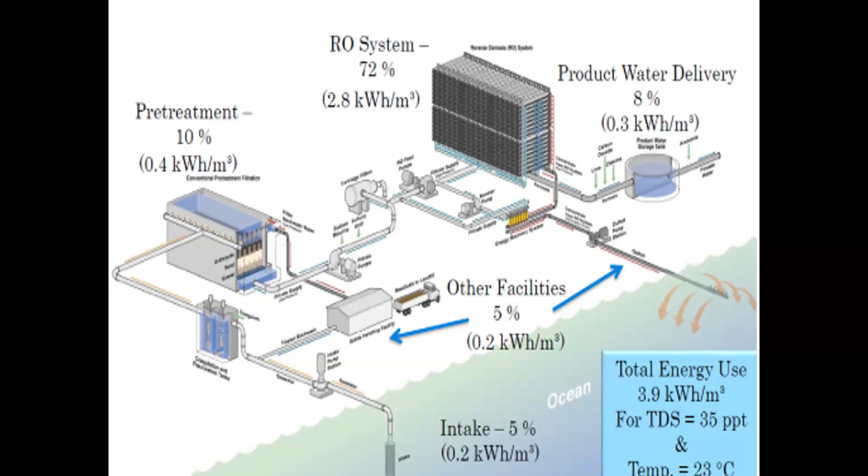$2.50 per kiloliter. Kiloliter, yes, 1 kiloliter. How much? $2.50. Right. Exactly, it's around $2.25. So for 1 cubic meter of drinking water and tap water in your house, you pay around $2.25.

So seawater desalination is very expensive to produce 1 cubic meter. You need energy. I'm talking about only energy, because you also need chemicals, maintenance, pump replacement, and a lot of operational labor cost. But this is only the energy cost, $1.2 for 1 cubic meter. And you pay for your tap water around $2.25 per cubic meter. So which means it's very expensive.

So how can we reduce this energy? The Sydney desalination plant produces almost 250 million liters per day. So which means you pay around $200,000 for energy cost only.

That's why seawater desalination is bloody expensive to produce, because you have to pay an electricity bill every day of more than $200,000. That's the reason why people look at how we can save the energy cost, connect renewable energy, and make sure the energy cost is managed. So that's something we have to be clear about. For SWRO, you need to calculate energy.

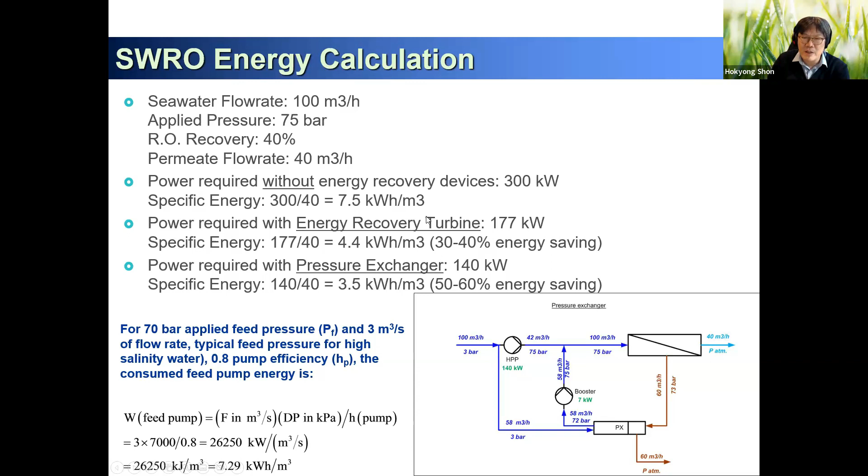So let's say 1 kilowatt is around $0.29 in Australia. So for the Sydney desalination plant, you need to pay almost $290,000 every day. To put 1 kilowatt in perspective, consider a 100 watt light bulb operated for 10 hours - that uses around 1 kilowatt hour. Or maybe you have 10 light bulbs for 1 hour, that also uses 1 kilowatt hour.

So how about your refrigerator? You operate it 24 hours, 7 days a week. So how much energy do you consume from your refrigerator every day? You'll find it's almost similar to desalination, like 4 kilowatt hours. On average, one household consumes about 20 kilowatt hours per day. So desalination uses 4 kilowatt hours just to produce 1 cubic meter of desalinated water.

So I will show you a video of the pressure exchanger theory. Let me show you. So this is the concept of the pressure exchanger, how it renovates our seawater desalination. So you can see the pressure exchanger.

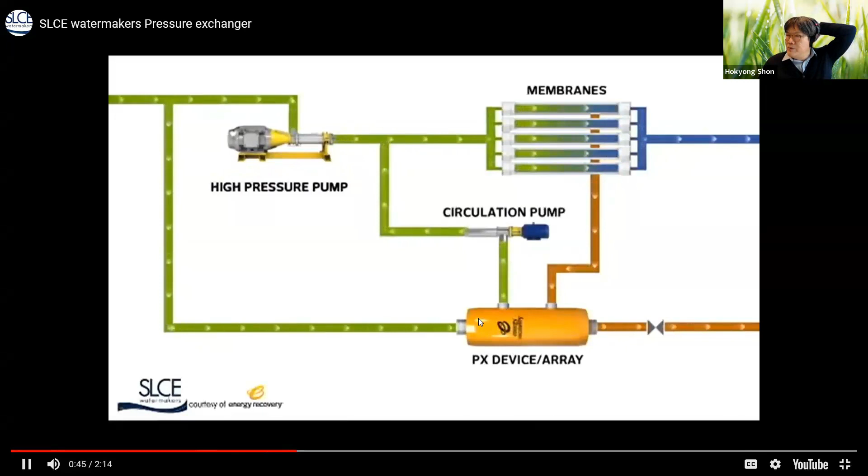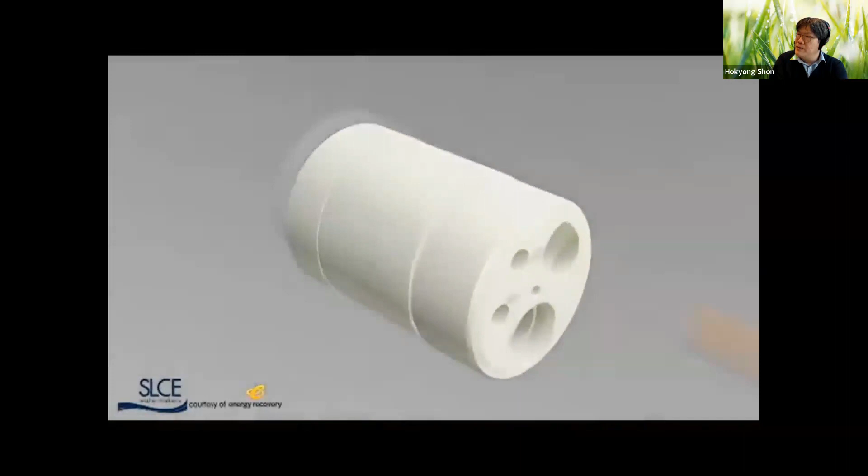Energy from the hydraulic pressure within is transferred directly from the concentrate to the seawater via the rotating ceramic rotor. The pressurized seawater now goes back into the system and joins the high-pressure pump, using the pressure exchanger.

Any remaining concentrate exits the rotor at a low pressure and is pushed out by fresh seawater at low pressure. The rotor ducts function like a cartridge, charging and discharging as the pressure transfer process repeats itself. The rotor, using only the fluid flow, can spin up to an astounding 1,200 rotations per minute, harnessing energy that would otherwise be wasted.

So PX devices like this guarantee the highest efficiency and availability, at 98%. The video looks slow, but the real condition is very fast.

So you have a 60 bar pressure connected with your system, so that you will have a very high rotation of your pressure exchanger. So that's how it works for the pressure exchanger.

So do you have any question from this one?